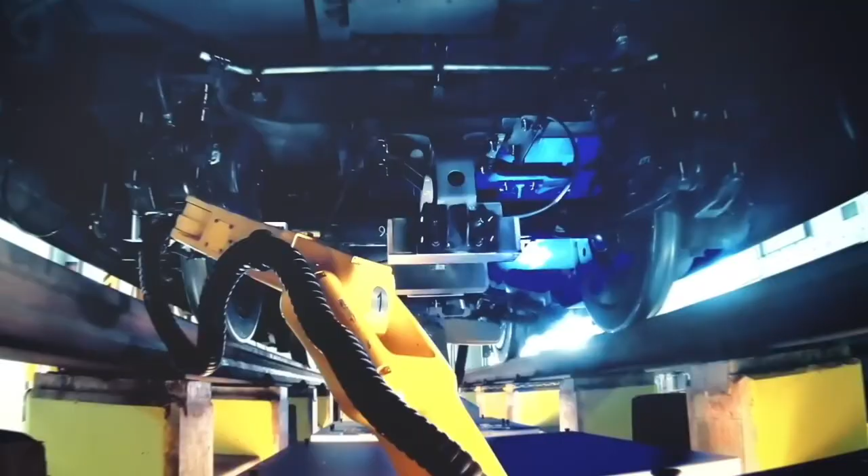It's getting better. Hong Kong's transportation will change a lot thanks to the new multi-billion-dollar link between Sha Tin and Central. The number of people who love it is so high that it would make the London Underground green with envy.

But things haven't gone as planned. There was bad weather and a dangerous outbreak during the building process, but that seems like the easy part. Since I can remember, the building of this line caused one of the biggest construction scams, an event that has shaken Hong Kong's construction industry to its core.

What a great new railroad it is, and how did it almost go so badly wrong? First, let's talk about where this new train line is located so we can understand how important it is.

The areas that make up Hong Kong are Hong Kong Island, Kowloon Peninsula, the New Territories, and a couple hundred islands with few people living on them. The issue is that Hong Kong Island is the main place for business in the area. How are people who live here to get to and from work every day when this is in the way?

That being said, you could drive through one of the road tunnels, take one of the high-frequency MTR lines, or if you're really sad, ride the Star Ferry, which has been a Hong Kong icon since it opened in 1888. Easy, simple, and effective - the Hong Kong train has been the main way people get around in Hong Kong for a long time.

The Sha Tin to Central Link, a huge $10 billion train that would change how people get around Kowloon and the New Territories, and add a much-needed link to Hong Kong Island, was designed to keep up with demand.

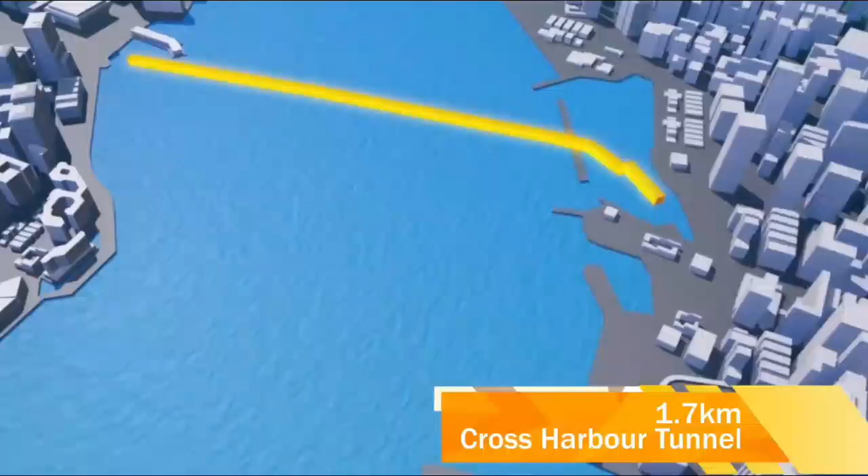To connect the rail line to Hung Hom, a stop already there on the north side of the crossing, a tunnel had to be built that was shallow enough so that trains wouldn't go slamming into the harbor like a roller coaster. The team chose a submerged tube tunnel over cutting through the rock.

We are able to make sure we meet the train alignment to connect the Hung Hom station to the landing point on Hong Kong Island thanks to the immersed tunnel approach.

To make it work, a trench is dug into the bottom of the ocean, and parts of the tube that have already been built are towed out to sea level. These parts of the tube were sunk, put together, and covered with earth that was dug out. Water is pumped out once the whole thing is waterproof, and presto - you have an underwater train.

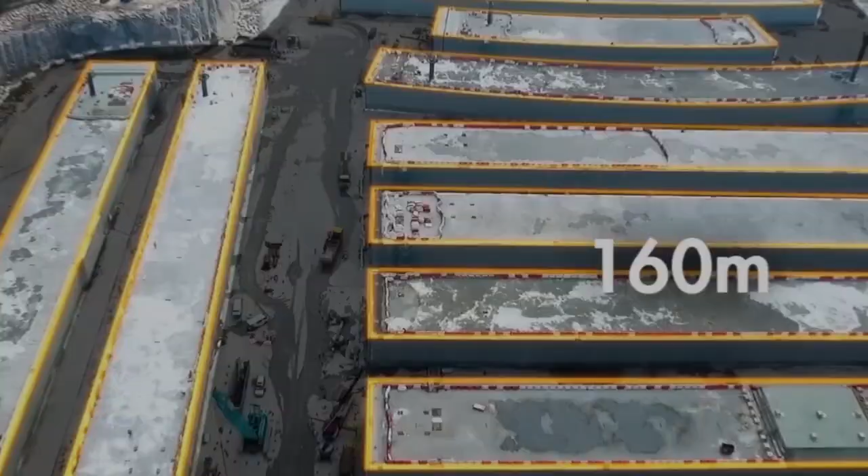The 11 parts of the tunnel were built here, where there used to be a quarry. Both units were 23,000 tons heavy and were about 160 meters long, 9 meters tall, and 20 meters wide. When they were done, they flooded the quarry and moved the tubes to the north side of the island.

While that was going on, a specially made rock spreader was making the bottom ready to make sure it would be stable enough to hold the tunnel's huge weight.

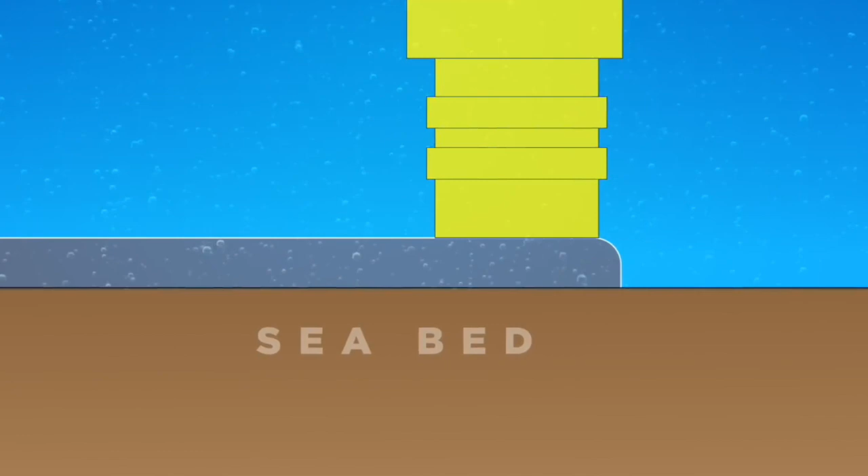We need a gravel bed before the submerged units can be put in their final place. An automatic system in this gravel spreader lets it not only put down the gravel, but also make sure it's the right width and level before the final units are put in place.

Divers used to do dangerous work like checking the thickness of the rock bed by hand, but this machine took their place.

Not only was all of this hard, but there was also a tropical storm going on at the same time. It would take about a week to move the prefab unit from the Shek O casting site to Victoria Harbour. While one unit was being moved, a storm came through very quickly, but luckily it was able to moor in a safe place called Junk Bay.

That's 2 kilometers through one of the world's most highly populated places. The tunnel had to squeeze through this, and then connect to a station so busy it was popular enough to be a joke. It had to do this without stopping service on any of the 3 other lines already running.

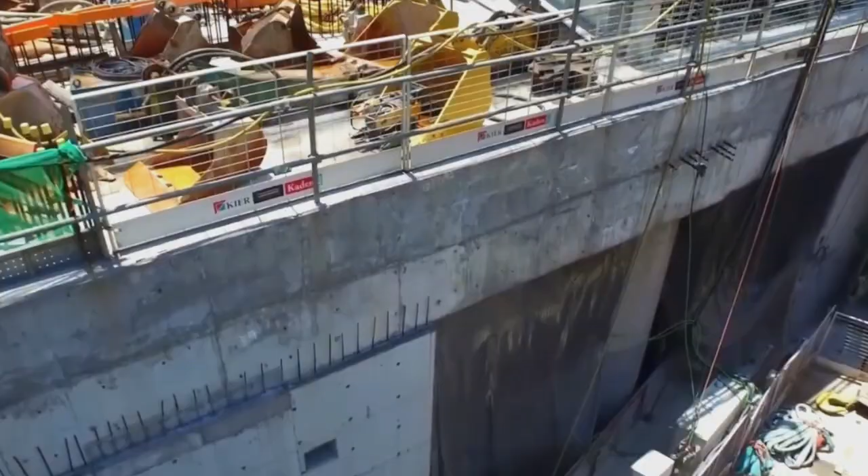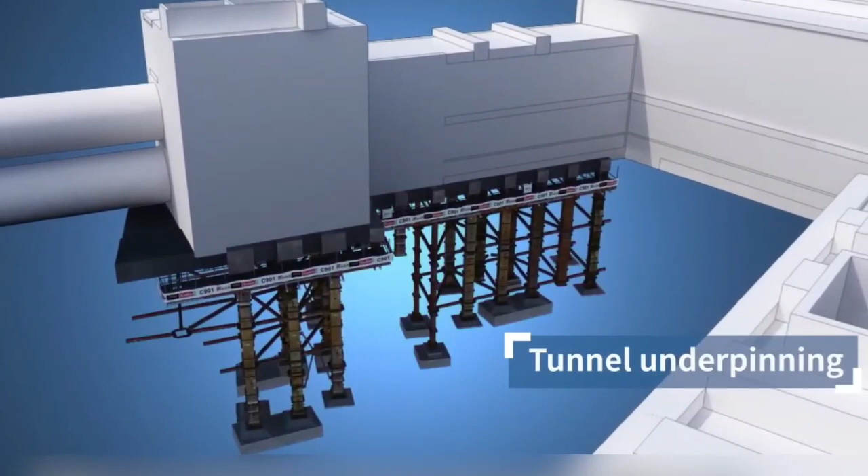There used to be 2 lines through Admiralty Station, the Tsuen Wan Line and the Island Line. After that, the South Island Line opened in 2016. We've been building the Shatin Central Link platforms over the last few years as part of that project, and to do that, the current stacked tunnel along the Island Line needed to be underpinned for about 60 meters.

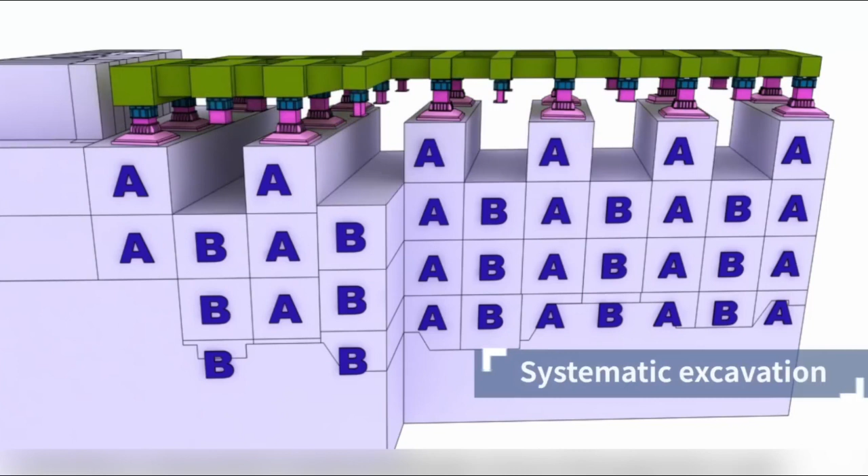There were 2 sets of posts in the ground below these platforms. The ground was dug up and supports were put in a series of alternating steps. 650,000 tons of rock were taken out and 5,000 tons of steel beams and supports were put in their place. What came out of it is this huge stop that connects East Rail to 3 other lines.

So Hong Kong has won again. Hugs and compliments from everyone in the crowd.

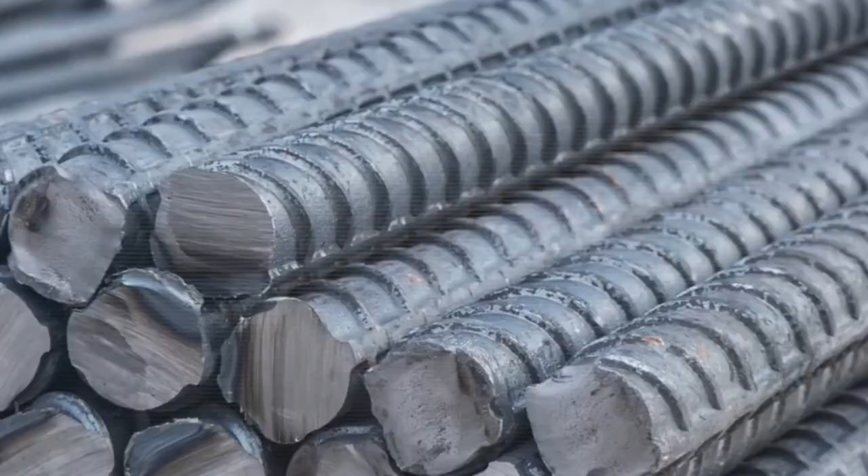Not quite. A whistleblower incident happened in 2018 while Hung Hom Station was being built, which put a shadow over the whole thing. A worker on the site named Jason Poon started it when he said he thought dangerous safety rules were being broken, due to work done on the station platform. Poon said the steel bars, or rebar, connecting the platform structure to the station wall were not being put in correctly by the building workers.

People weren't putting the rebar into couplers, which connect two sections. Instead they were cutting it so it looked like the two sections were joined. Once the structure was filled with concrete to make the platform, it might not have been stable anymore and could have fallen down, causing terrible damage.

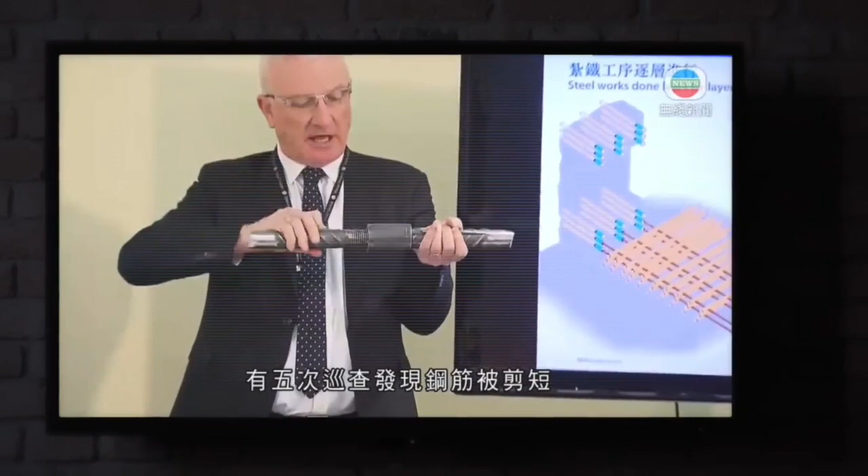As word of the accusation spread in July of that year, the Hong Kong government hired former Judge Michael Hartmann to lead an investigation. What they found was pretty bad. One check in April 2019 found that 39 of the 191 steel bars dug out for inspection were too short. It didn't end there.

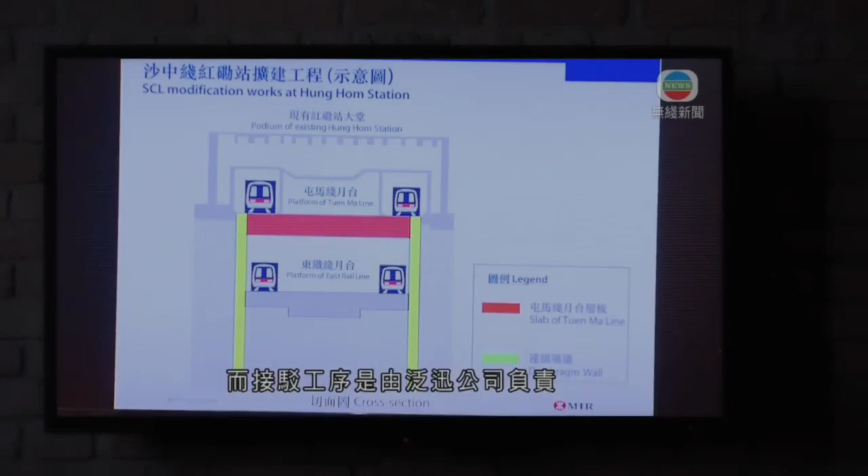Jacob Kam, CEO of MTR Corporation, and Frank Chan, Secretary for Transport and Housing for Hong Kong, both openly apologized for the scandal. Chan promised an internal review to make sure something like this doesn't happen again.

At that point in the Commission of Inquiry, MTR did a lot of its own review. We saw that when parts of the work weren't done according to code and standards, we took the initiative to fix them, to make sure there were no questions before the station opened.

The judge said the station was fit for purpose and safe to open after repairs were made to make it stronger. As things stand, we value all of the findings and suggestions, and we've also taken those into account in order to move forward with our next set of projects.

The story was shocking, but it doesn't seem to have made people less excited about the new train line. Hong Kong's young people are becoming more and more interested in trains thanks to the MTR's steady growth. As the train network grows, it connects towns farther away from the city center, and happy new riders are only too happy to celebrate.